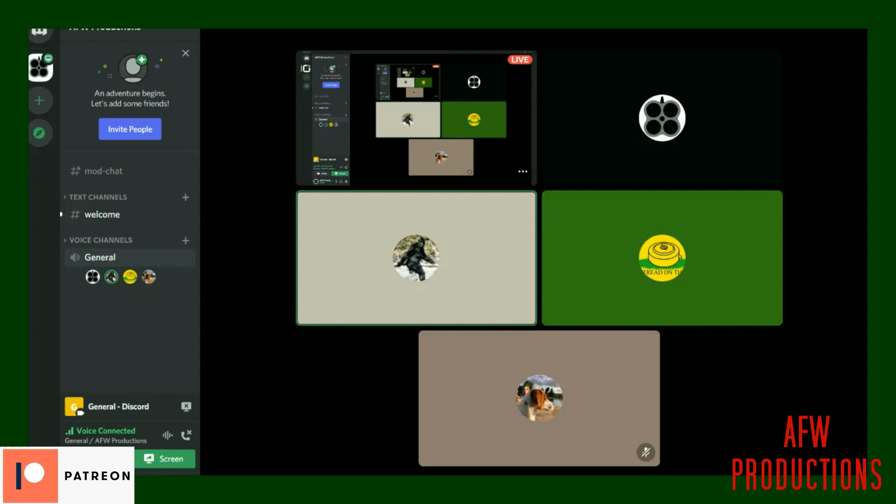All right, thanks. Thanks for doing this, first of all. Small list of questions here. So my first question was, what are all the differences between the Thorncaster and the original Lancaster pistol?

I do want to make one that is actually more of an accurate representation that has the rifling in the barrel machining itself. But for more of a commercial product, something that can be more diverse, I do plan on trying to make one with barrel liners. All you need is essentially one design for the pistol itself, and then I can use different barrel liners that all have the same outside diameter, and then the bore of them is just different calibers.

But other than that, there are a few other features that I do want to change. I want to improve on the sights a little bit too. The sights on the original Lancaster pistol are very open because it's supposed to be something that's used more or less at a closer range. So I want to try to tighten those up a little bit, and part of doing that is I'm actually going to increase the range of this pistol itself.

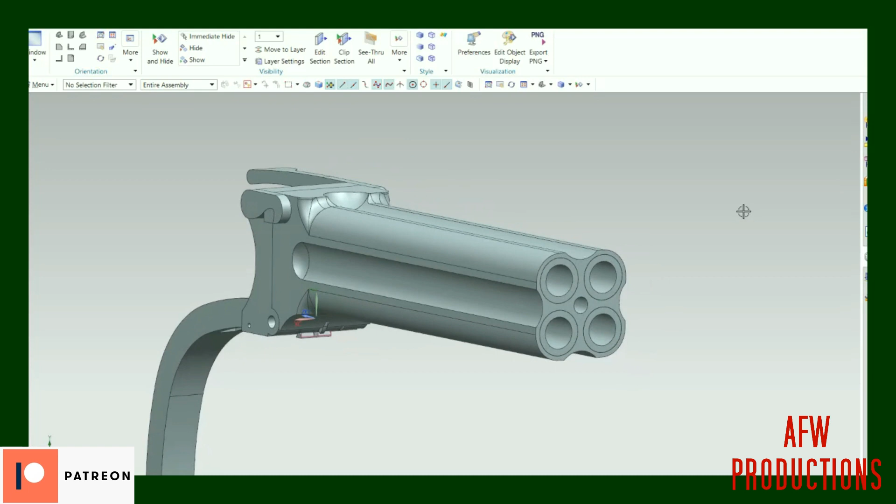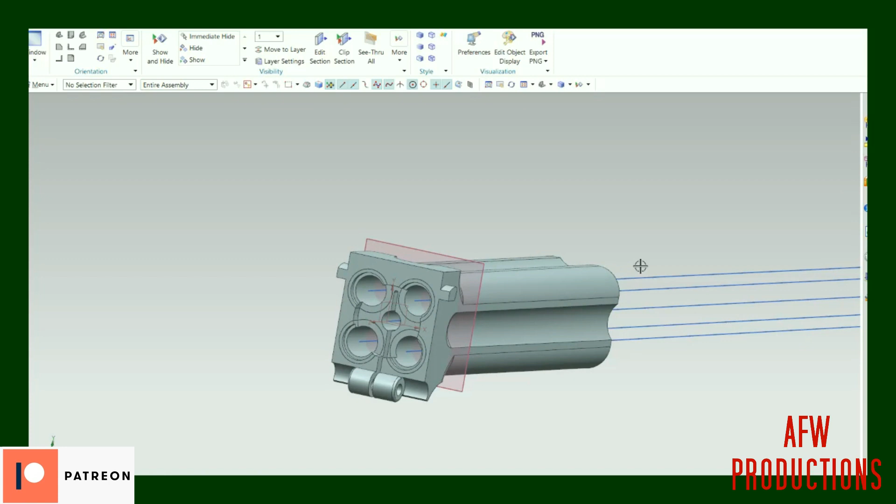So the original barrels are actually slightly angled, right? And there's a point out in space where they'll all converge. And so you see these lines here. Essentially, this was me doing calculations and figuring out what the center line distance between these barrels is going to be, because they are all slightly angled inward. When I took my measurements of the original Lancaster pistol, this only came out to be about 6 feet away from the tip of the barrel, which isn't very far. And so my plan is to increase that to about 25 feet.

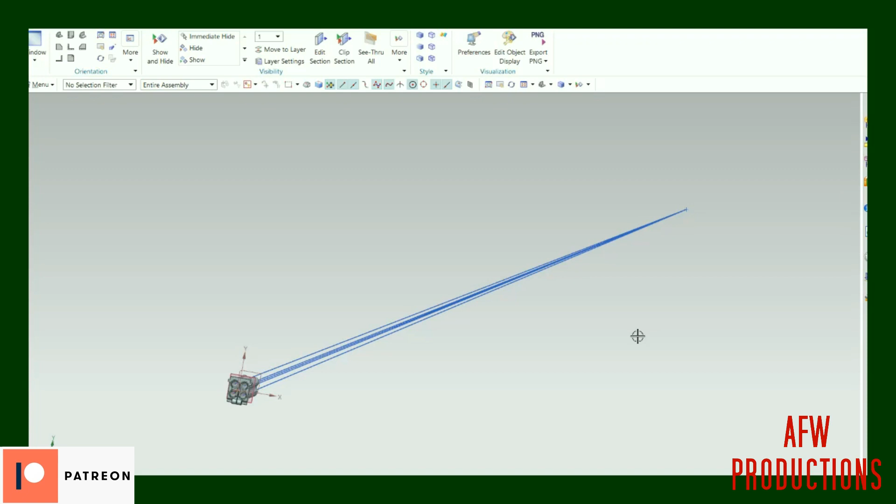Something that's going to give you some more range, is going to increase the accuracy of it, right? Because if it was only set for 6 feet, then after you pull the trigger, the bullet travels 6 feet, and then after that, your spread starts to increase drastically. So, past about 10 feet, your accuracy is going to be not that great. So I definitely do want to make it so this does have more range. It has more versatility with it.

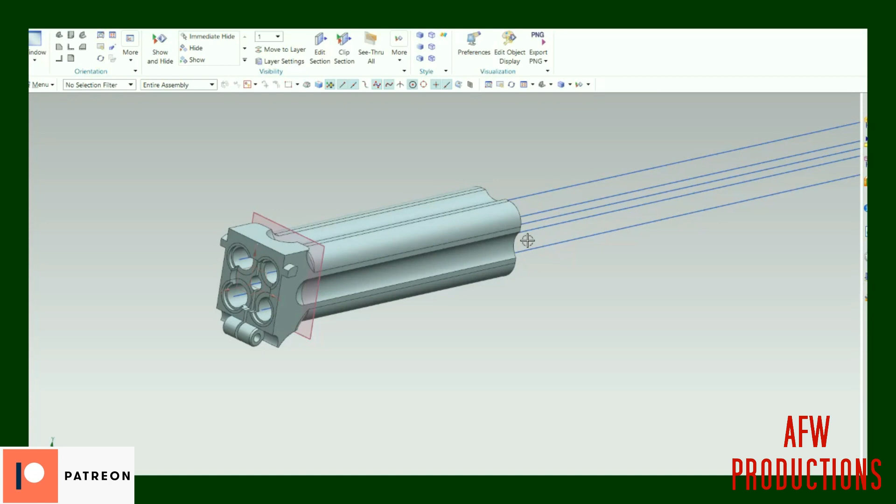So part of that is also for if you're using this, say, for target shooting, or if you want to go use this for hunting or something like that, because these pistols were initially made to hold shot shell. You had asked earlier on the Discord what calibers I want to do this in, like 45 Long Colt, which you can use shot shell in, or even variants of the 410 shotgun shells. And so having more range, so you're able to use it in more of a hunting aspect, say hunting pheasants, opens up that opportunity to use this in more situations than just up close and personal.

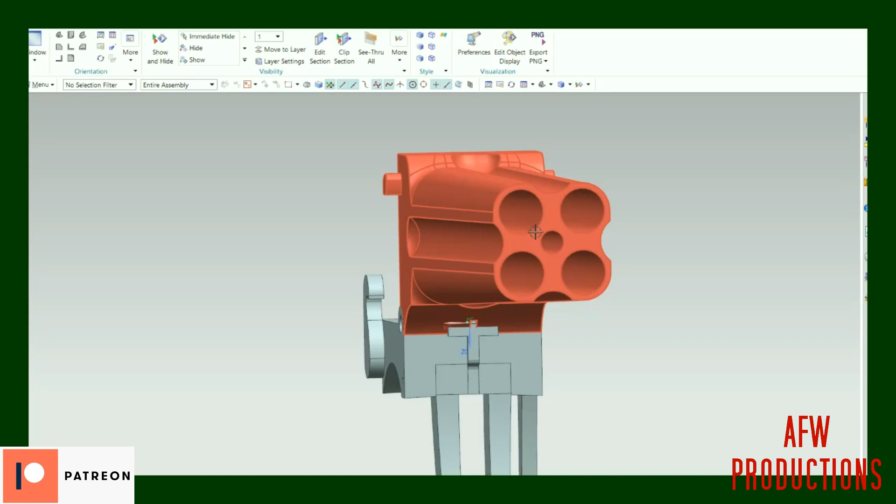Like I said, I do plan on still making more of a true variant that does have the original barrel machining. But there were a few little nuances throughout it. I'm trying to keep it as true as possible, but some of the stuff that I found is a lot of these pistols were kind of custom made, so the parts are not universal parts, right? If you actually look at these hooks here versus these lugs, they're different on each side, and they're actually hand ground or hand sanded and filed down so that they fit perfectly with each other.

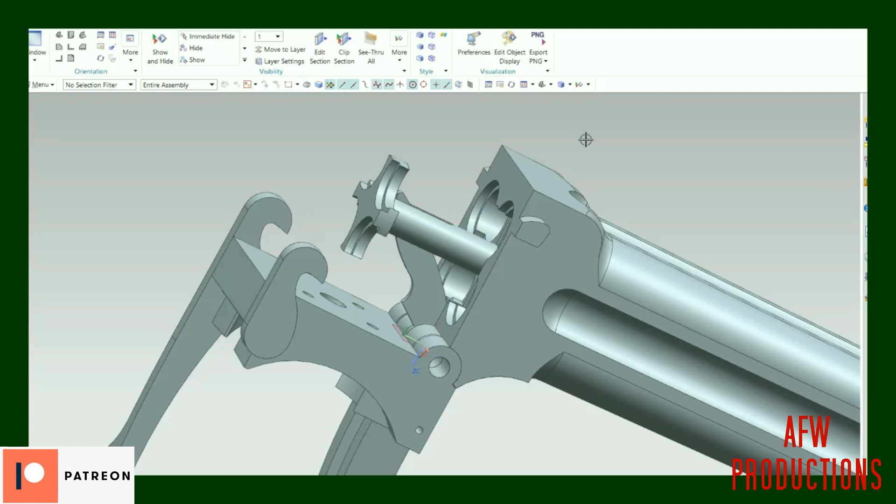So if I go and take one of these barrel machinings and I take the screw out here and I try to put it on a different Lancaster pistol, even one of the same size and caliber, it's not going to fit. So I want to take this away from a more unique individual part-to-part fit and make it something that's a little bit more modular. Even with this extractor lever here and with the extractor itself, kind of some of the same situations with that.

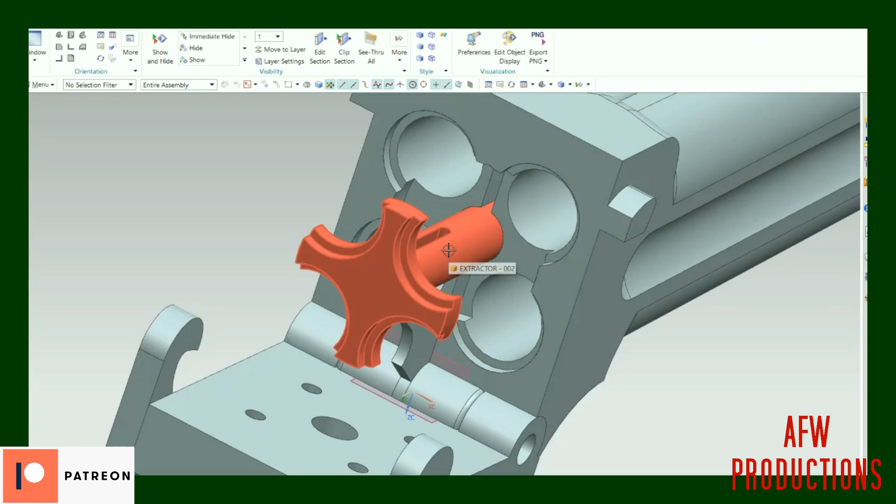One of the things I talked about in my video, getting back to it here, but this feature right here, the original extractor actually has a piece here. And what this does is this fits into a groove inside the barrel machining.

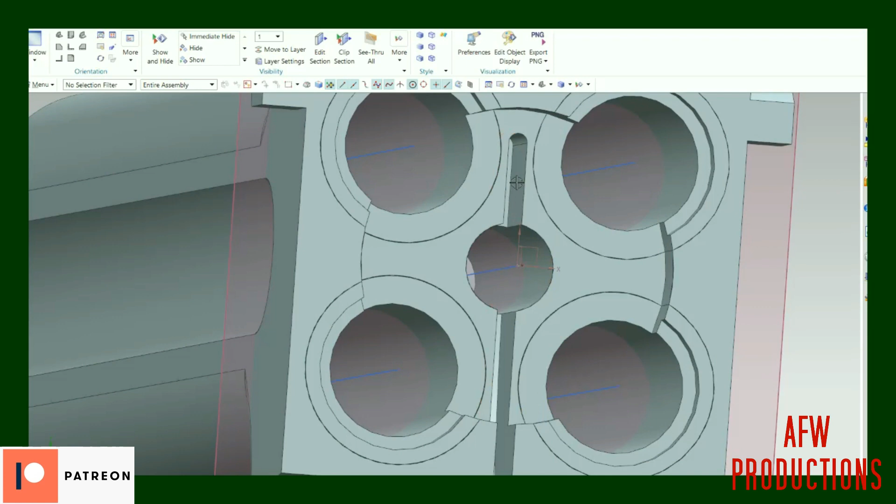And so in here, this notch that I have taken out is actually for that little lever that you see here, right? This is for this to sit inside of there. And I know I'm bouncing around a lot, but I'm trying to give you a little bit of an idea of how this looks and what you're actually seeing.

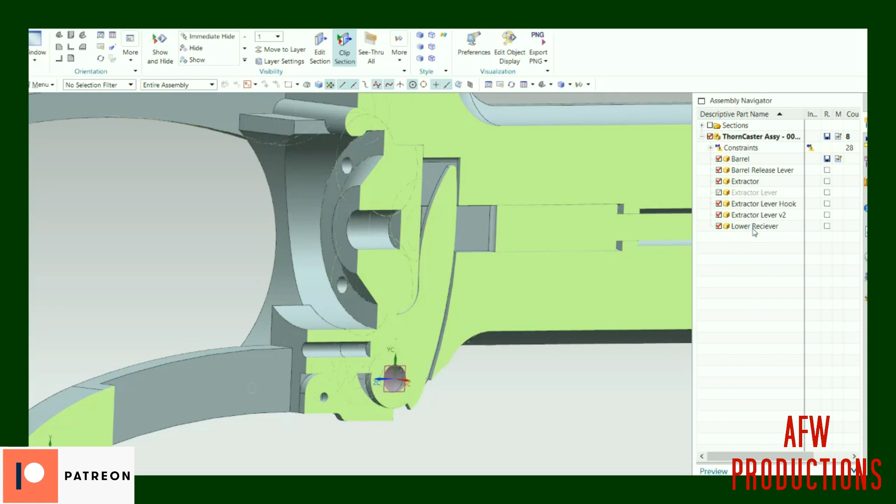So this is a cross-section view here, where this piece here is actually your extractor lever. You've got your extractor here, and let me hide the receiver. Let's turn it off so you can get a better visual. But essentially, there used to be another notch here in the barrels for this extractor to actually sit in there. And what it did is it helped the clocking of the extractor itself.

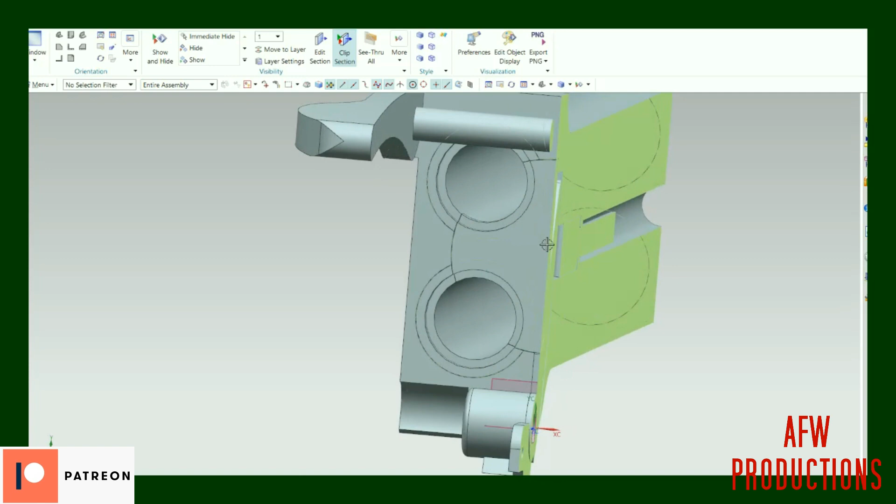So this wouldn't rotate as it's being pulled out of the barrels, right? And there's only one way that an extractor could actually fit in there. And the issue with that is you have this very long, very narrow channel that's just difficult to machine. They don't really make end mills that are that long and that tiny. You'd essentially have to go to a more complicated form of machining, something that would drastically increase the price of machining these barrels.

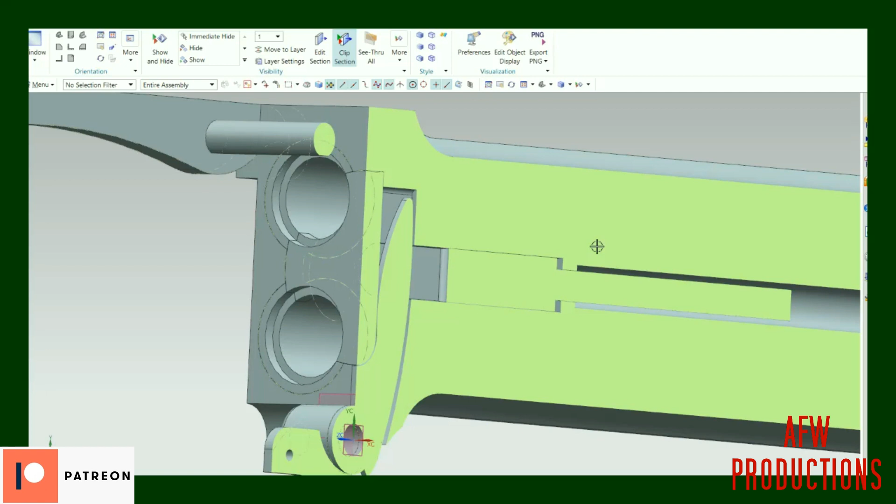And so I'm trying to take into consideration manufacturability in the design. So when I make a change, it's something for producibility or manufacturability, or something to help drive costs down rather than keeping it one-to-one exactly true to the original pistols. But other than that, I did come to a stopping point with the original design and using the barrel liners, and so I've actually been transitioning the models that I had for the Thorncaster with the barrel liners to more of a final model Lancaster, almost a one-to-one reproduction.

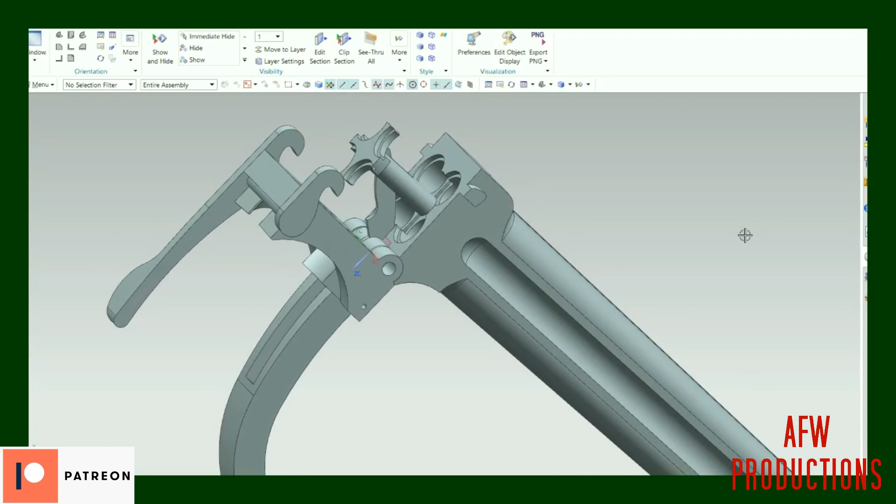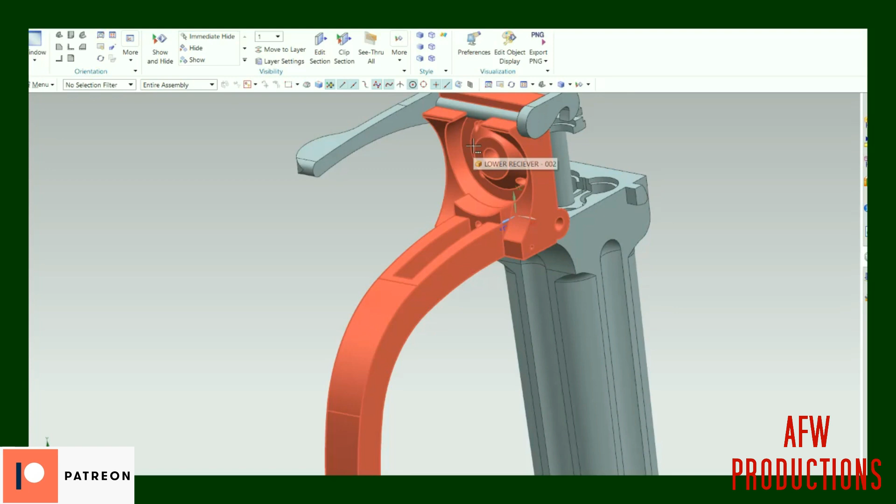The reason why I made that switch was because the design of the pistol was getting almost too large for you to hold in your hand. And with that, a lot of the mechanism in the back was changing quite a bit. So to get away from having to completely redesign everything, I've switched to doing more or less the Lancaster pistol itself, closer to a one-to-one replica. That way I can understand how that's going to translate into doing the Thorncaster itself, which is going to have a much larger frame.

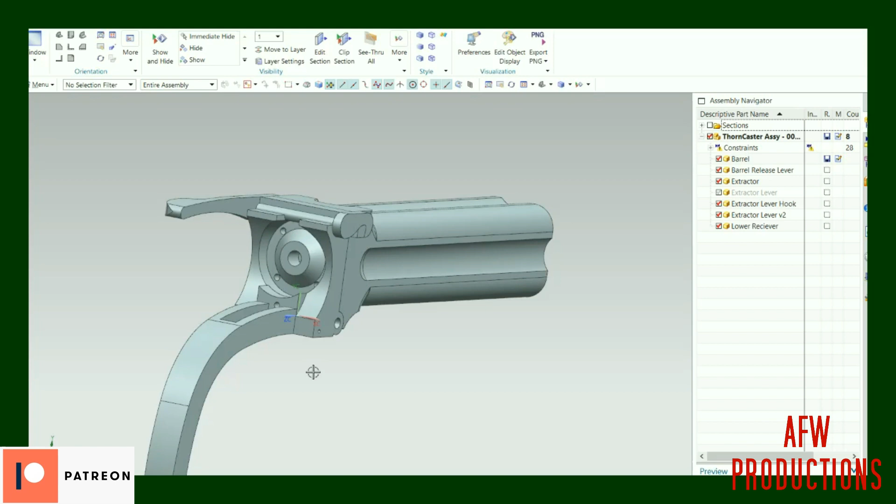But the clockwork mechanism back here is still something that I'm working on. It's still something I haven't fully defined. It does use a lot of spring clips. It does use a lot of older methods that could be done a little better. So that mechanism in the back is probably going to be improved upon, but I can't really say this is what the final product's going to be and how it's going to differ back here. Does that answer your question?

Yeah, that kind of helps, thank you.

I have a couple of questions actually. Sure. So the replica is going to be made for smokeless powder, correct? Yes. So it's going to be made for more current cartridges. It's not going to be made to use black powder or some of these older cartridges from around the turn of the century when this pistol was made back in the 1800s.

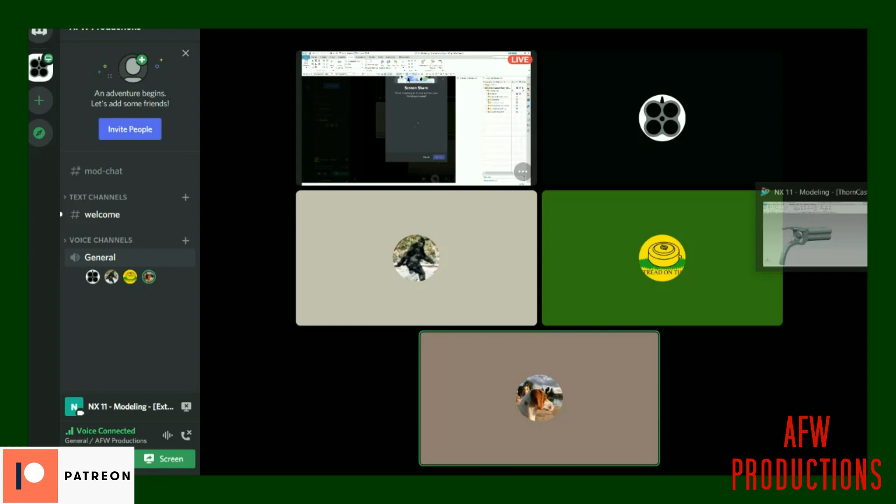Sure. So the question is, from a material science or design standpoint, what changes did you make to accommodate the change from black powder to smokeless powder? Or what's planned to be changed at least? What you're getting at is what changes am I making so that the barrel doesn't explode, right? Essentially, yeah, for the higher pressures, how are you compensating for that? Is it a change in material, change in barrel thickness, etc.? And so it's more or less a little bit of both.

So like with the barrel liners, you can actually see this is currently set for 45 Long Colt, right? And so with this, you've got the barrel liners and you've also got a lot of material around the barrel liners, because those liners are pressed into the barrel machining itself. And the wall thicknesses are getting quite large.

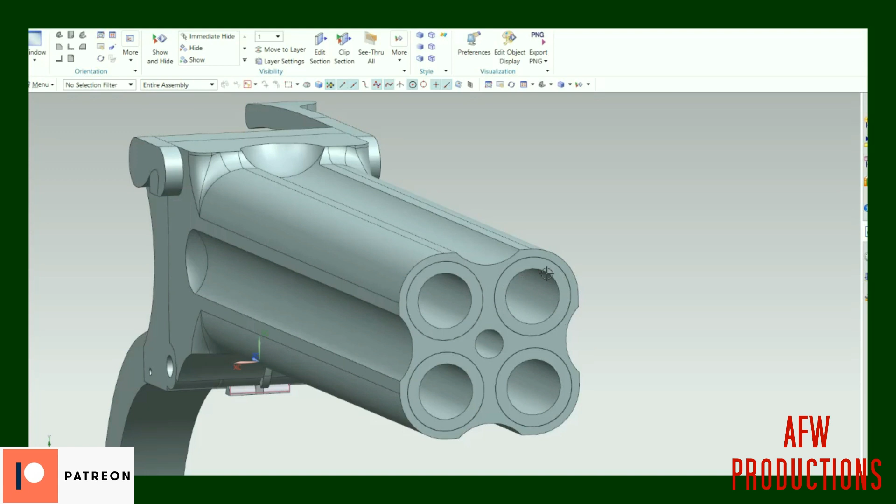Now, granted, this is just an off-the-shelf barrel liner, which is supposed to be able to handle those pressures for a modern 45 Long Colt. But then also, yes, adding more material around there too. But a lot of it's going to be once I get a design more fleshed out, and the materials I'm going to use, maybe what the material of the barrel liners is going to be, or even on the more true replica, what the material is going to be, I can do stress analysis in NX to find out what that's going to come out to be.

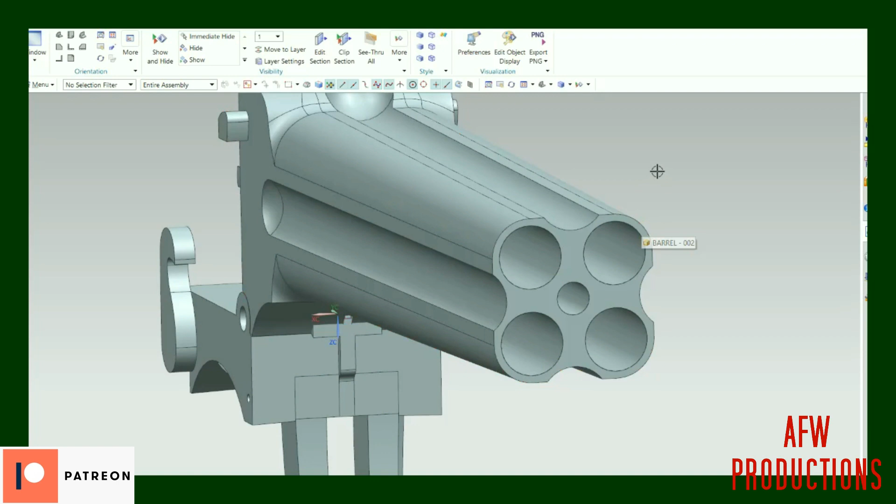It is almost a little bit of trial and error at this point. I do plan on proofing these regardless of whatever calculations I do to compensate for using a more modern cartridge. I do plan on testing these and making sure that they're not going to fail.

But as you can see here, to your question, you can see how thick the material is back here by the breech. And even when it starts to get away from the breech and the boxiness of it and you get more into the curved barrels, if you look at the thickness here from the bore to the outside, it gets a lot thinner as you go down, which is also kind of what the original Lancaster pistol does to a certain degree.

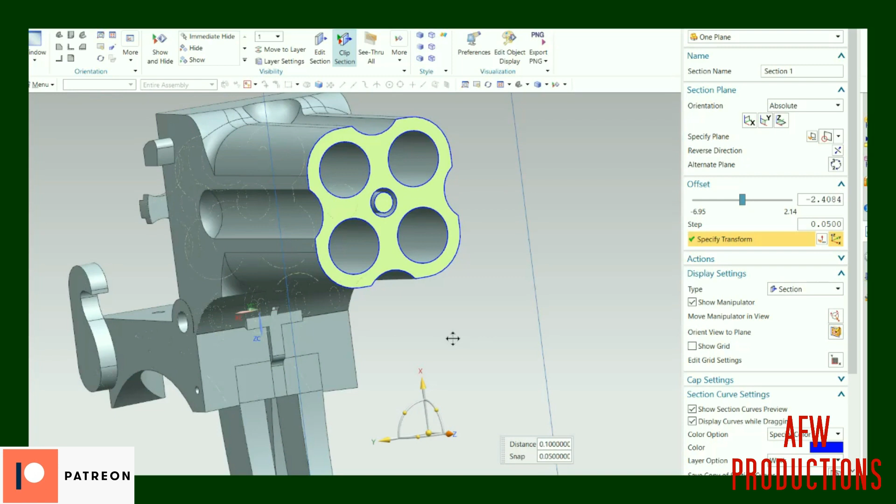But I'm trying to make it so that the thickness of this is actually extended further down for the longer cartridges. The current one that I've got is chambered in 476, which is very similar to 455, just a little bit longer. But if I'm going to be using 45 Long Colt and somebody wants to maybe try to put 410 shot shell in here, this is going to have to be able to hold those pressures further down in the barrel. So yes, thickness increases, and material properties are going to have to be looked at and analyzed.

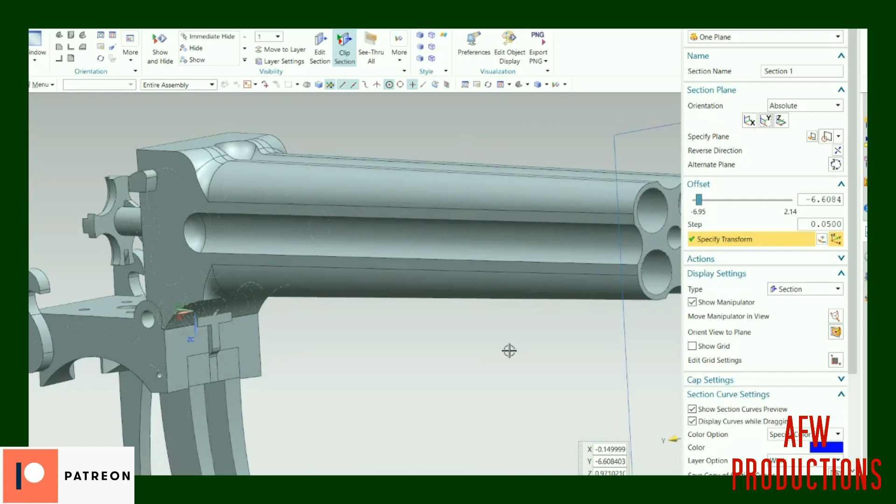And then ultimately, regardless of all that, we're going to go ahead and proof this. We're going to make a barrel, create a jig, slap some shells in there, and do like a 25, 30% overload of the charges, put it through there and see if it handles it. We could see the barrels failing on us, or they could handle it just fine. But either way, we want to make sure we're testing that to the fullest and not just releasing a product that's going to blow up the first couple times you shoot it. Does that answer your question?

I have another question that's more or less unrelated to that. So we talked a little bit about the planned differences between the original and the reproduction. Do you have any plans for a phase 2 or phase 3 where you release more modernized versions? I mean, the design can always be improved upon, right? But what I'm trying to do is more or less a more modernized version, trying to stay a little true to it, but also changing the designs in terms of ease of manufacturability.

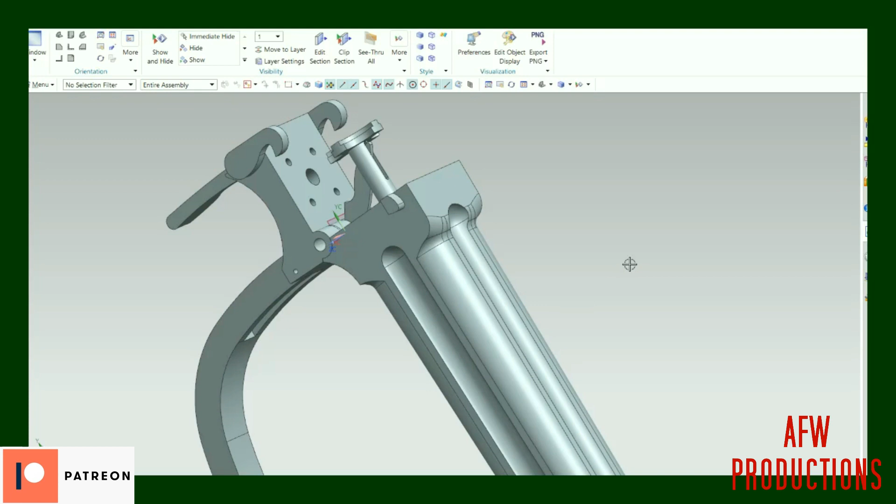But I do think later on down the road, after, say, I do one that has the barrel liners, maybe one that's a little bit more true, I can definitely come back and look at this, like a phase 2, phase 3 kind of aspect: what can we do to make this the most modern, most efficient, make it modular and easy to work on, compared to taking something that's already existing. So it's kind of on the back burner, because it's going to really depend on how successful these turn out to be.

So a Picatinny rail with a low power variable optic is off the table then?

I can... you know what, I'll tell you what, because I'm changing up the sights on this and I want to make it so that you can actually do changes in the sights. I'll work with you to create a certain type of mount where you can actually put a little rail mount on here and you can put a scope on there, and I'll work with you on that, Scott, all right? I think an ACOG would be beautiful on one of these suckers.

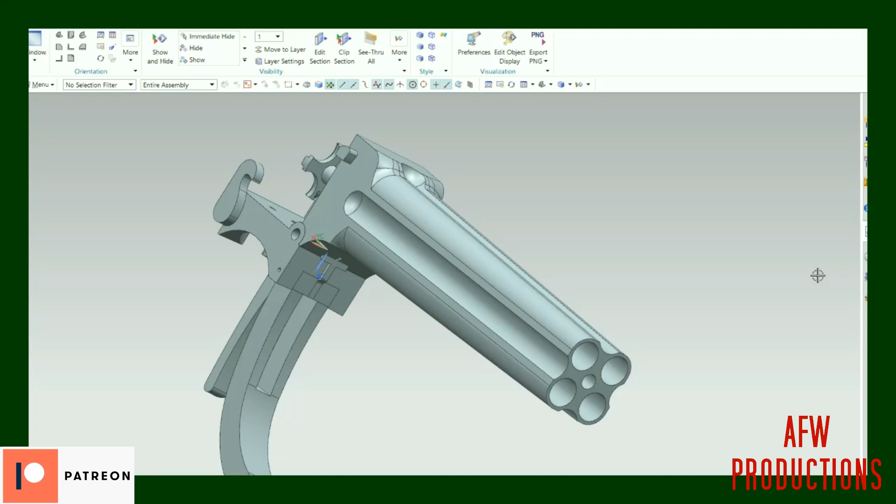Okay. We'll just go hunting with the hand cannon. We can hop back to Garrett. I know you still got some other questions.

Yeah. Are you still using the rotating firing pin mechanism? So yes. What's actually really interesting is in the video where I talked about the history of the company, the pistol, the previous owner, I even talked about some essentially imitation knockoffs that people were making around the time. And one of them was a pistol that instead of using the rotating firing pin that actually moved around, it had like 4 separate firing pins. And one of the issues they were running into with stuff like that is the multiple barrels would fire at the same time, or the gun would discharge when it wasn't supposed to.

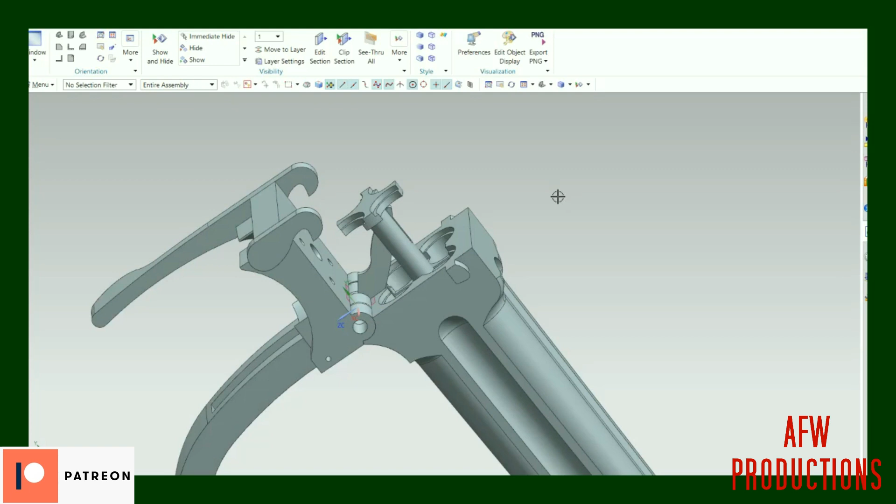So one of the things about the rotating firing pin is, like 150 years later, this thing is still a very reliable mechanism. Back in the late 1800s, this pistol was known for its reliability, for not having to clean it, not having to service it. And so keeping that mechanism while making a few tweaks to it is the direction that I do want to go. So yes, I do plan on keeping the rotating firing pin, but the mechanism itself may slightly change to be a little bit more modern or easier to manufacture or a little bit easier to use. Cool. Yeah, I like the rotating firing pin myself.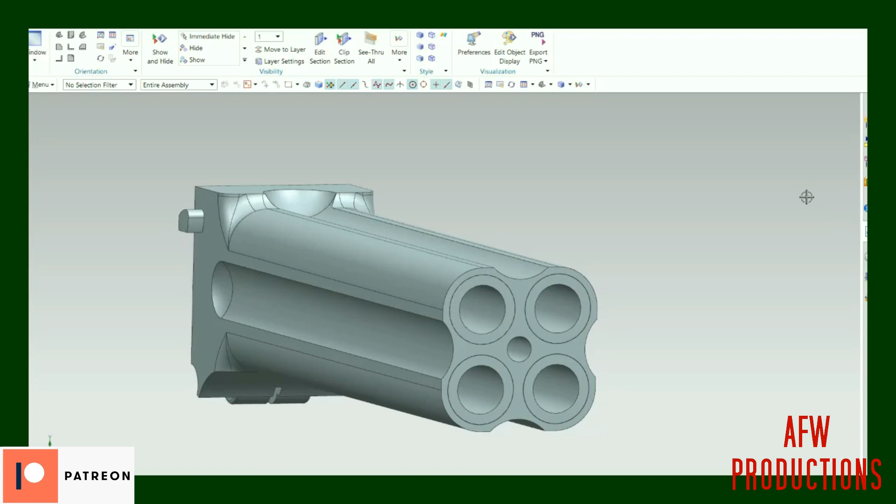Oh yeah, so you've been doing a lot of talking about barrel liners. Not too familiar with them. I think I understand. So this is the model with the barrel liners. Let me get rid of a bunch of these datums and curves so it's a little bit easier to just see the raw model here. So essentially, a barrel liner is something that you would slap down the barrel, and it's essentially to rebore it. In certain situations, they'll have an old gun where the barrel has been worn out because it's been shot so much that the barrel's degraded, it's been oversized, maybe it's pitted from corrosive ammo or something of the sort. And so they'll bore out the barrel itself, and then slide a barrel liner in there, and that allows them to get a crisp, clean bore in a damaged barrel.

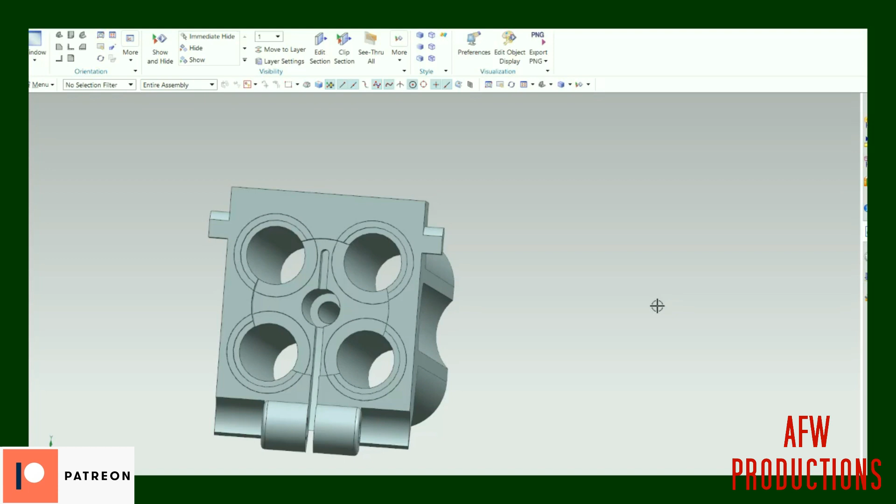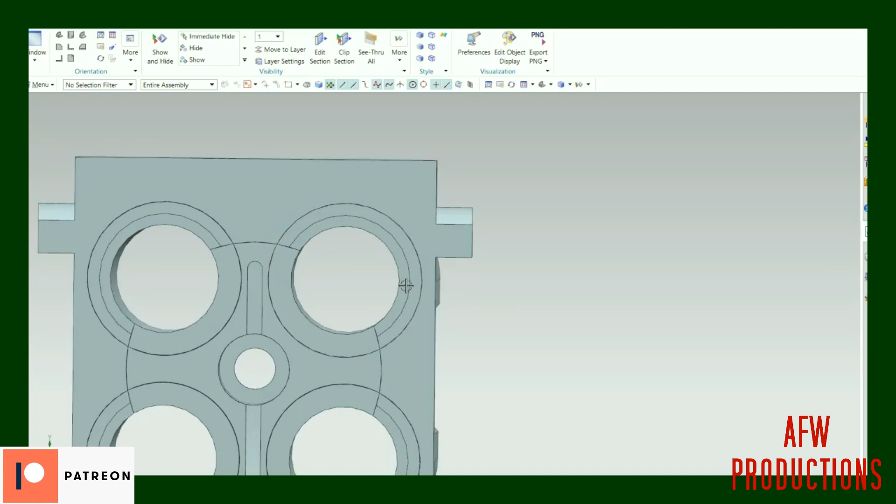I looked online, and what I'm basing this model off of is something that's just off the shelf. Because usually, say this bore got damaged, they would oversize it, and then they'd put the barrel liner in there that has the correct bore, and it's able to be press fit in there, and they sometimes use different types of epoxies and stuff of the sort. But my idea is to use that out of the gate, so that with the machining I start off with, I can use any kind of different barrel liner. So this is essentially what I would start off with, right?

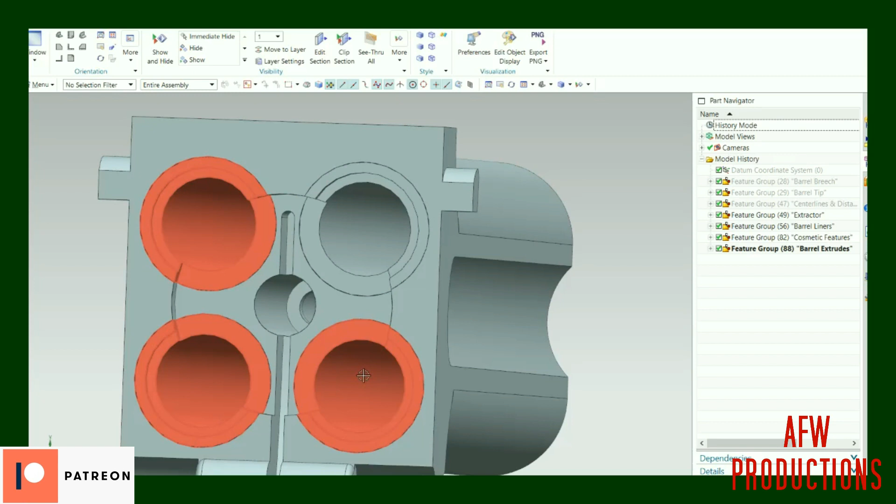Then depending on whatever caliber somebody wants the pistol chambered in, I can press fit a 45 Long Colt barrel liner in here, a 357, a 44 Special, whatever they would want. And the original design with the different barrel liners can be chambered in any caliber somebody would want without a complete redesign of the pistol. So that's a bit of how they're used, what they're used for, and how I'm integrating that into my design. Okay, cool.

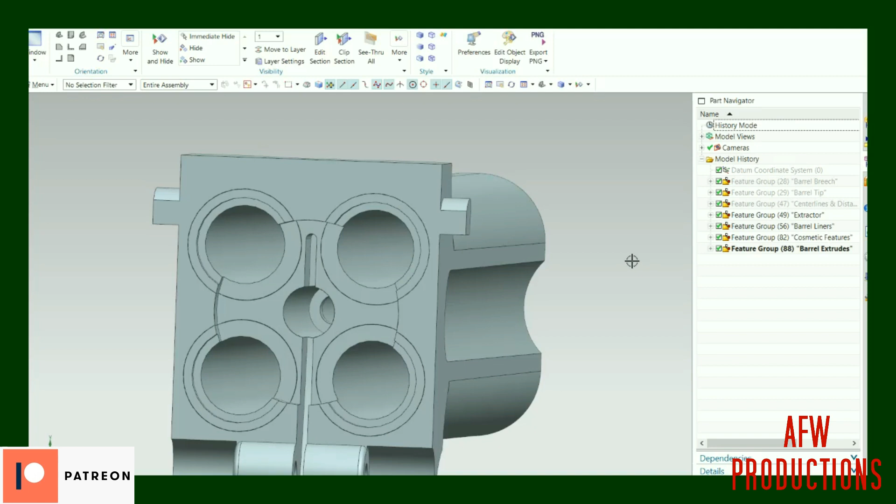So it's a permanent attachment, not something that the buyer could remove? I have been trying to think of how I want this design to be so that these barrel liners could be interchangeable. To start off with, I would like to have something that makes these barrel liners a bit more modular, so that you can actually slide in whatever kind of barrel liner you want to use.

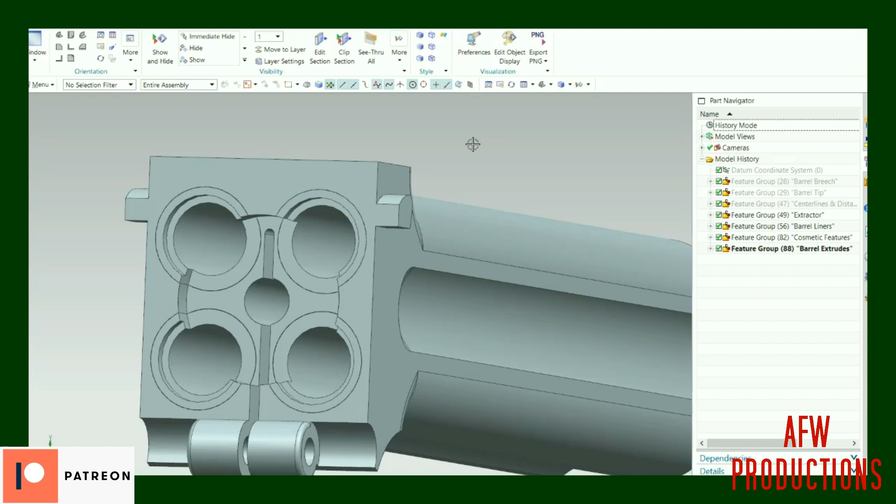You have your base frame without any liners in it. There's some sort of a mechanism that, when you slide the liners in there, it'll hold them in place in the correct orientation, and it's very easy to then change whatever caliber you want to be shooting.

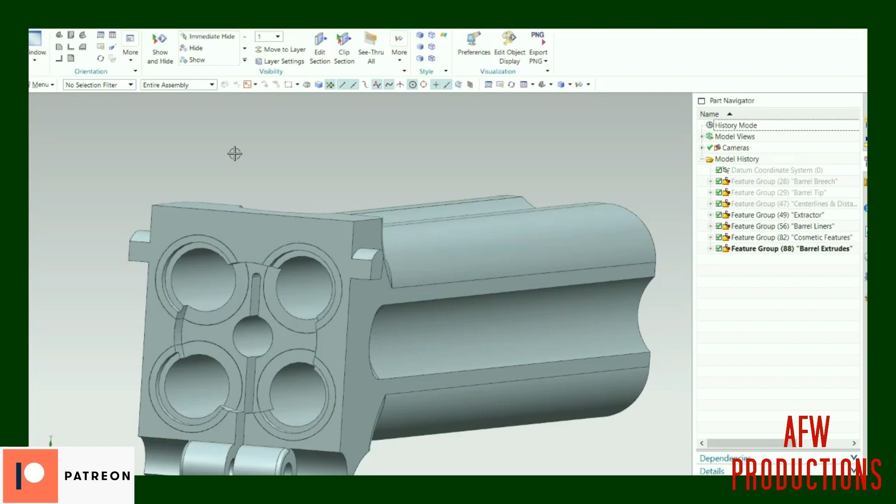Thank you. What about something like a shotgun barrel liner, so you can shoot different calibers out of your shotguns? Have you thought about that route, that you just slide it in that way? That would be an option. So I've got my counter bore for where my flanged casing will sit, right? So you're saying if I had a different barrel liner that I slid in there, that could be for, say, 357 or 38 Special or something like that. That would actually be an option.

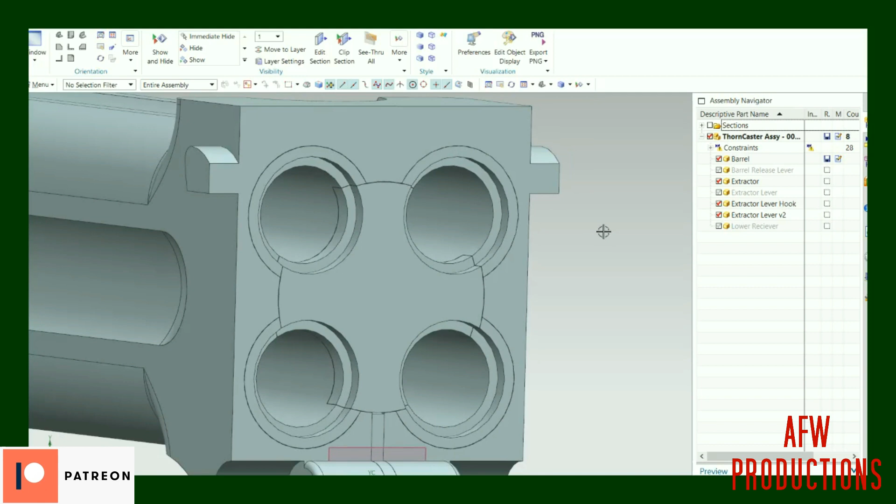So then I start off with, say, hey, I have this design. It starts off with 45 Long Colt, and then you put the different liners in there, kind of like you were saying with a shotgun, and you can actually change the caliber. And that's what you're getting at, correct, Mike? Yeah, that's what I'm getting at. I guess Garrett, back to you.

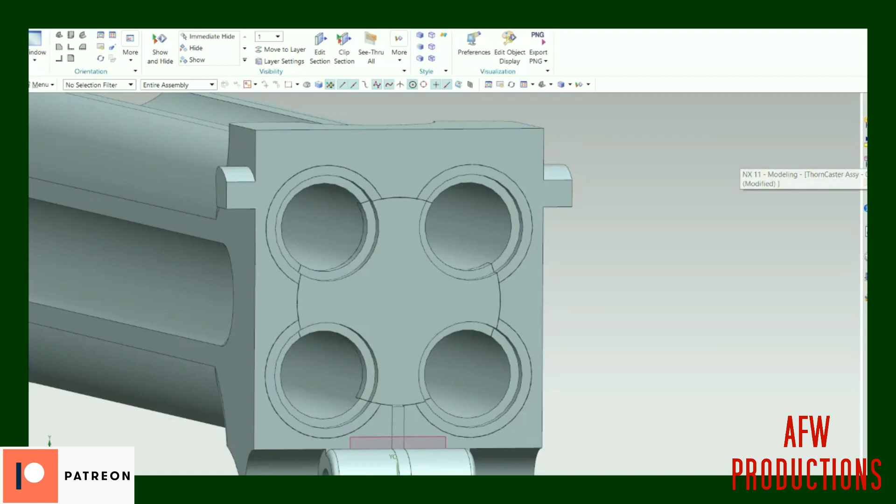All right. The original ThornCaster with no barrel liner would be in 45 Colt then? Is that what you're thinking? Yeah, both of them are going to be set to be 45. That's going to be the largest caliber that I'm going to do, and the baseline model is 45 Long Colt. Thanks. Personally, the reason I was asking about barrel liners is because I wasn't familiar with them, and I'd be most interested in one without the liners in 45 Colt. The interchangeability really doesn't matter to me.

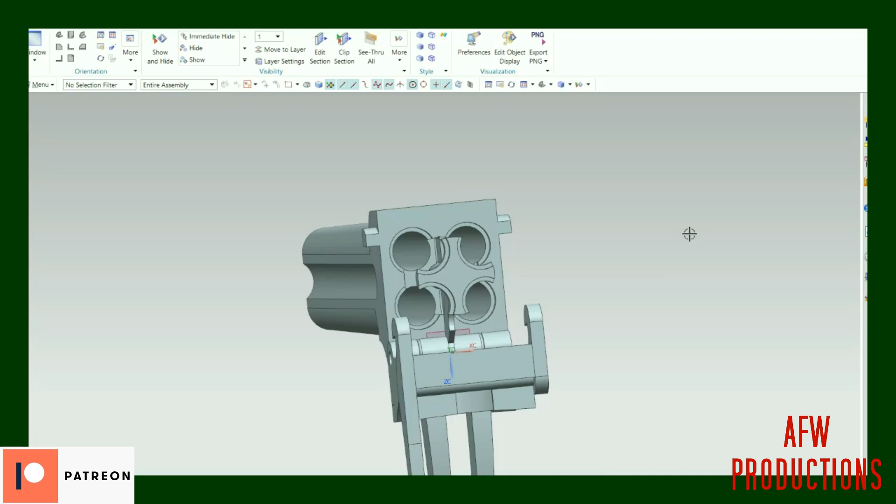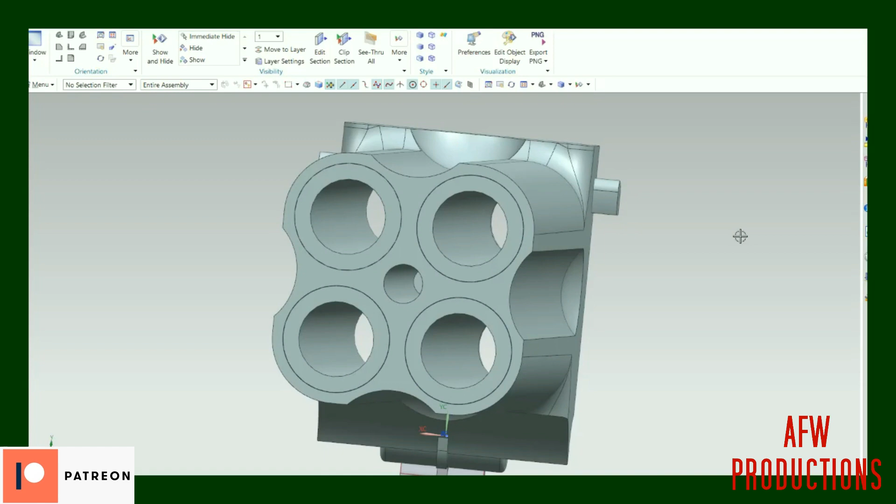I was just curious. Right, and so, I don't want to say I've been dragging my feet, but why it's been taking me a little longer to progress with the design is because using the barrel liners initially was an interesting idea, but I'm almost to the point where I'm thinking I might go away from that. To Mike's point, if I can have an original one that doesn't have any barrel liners, it's more or less a truer replica, and that seems to be a more desirable path, especially from a customer standpoint.

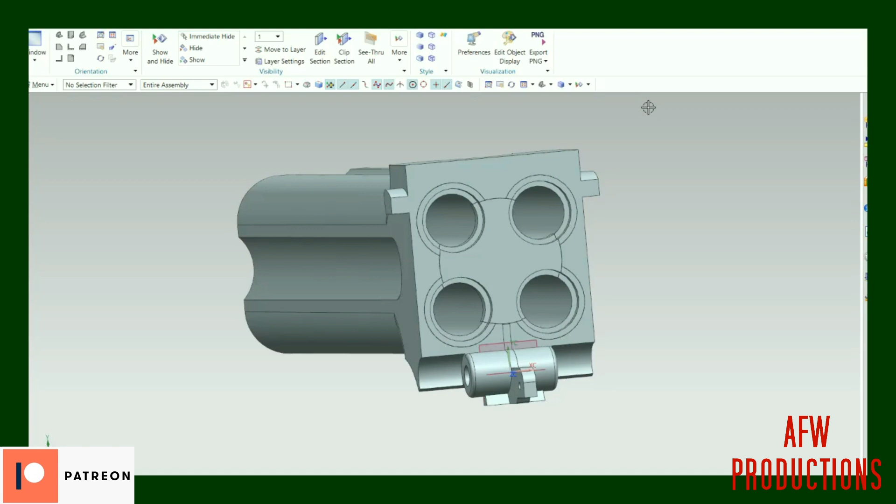But the other aspect too is, as I use the barrel liners, this is causing the pistol to become much wider in your hand. With that, the issue is how are you going to be able to hold that and grip that, and how's that going to work for you? The upscaling of everything, besides causing a lot more time and effort put into the redesign, is causing a lot of issues with just how you're going to be able to use the thing.

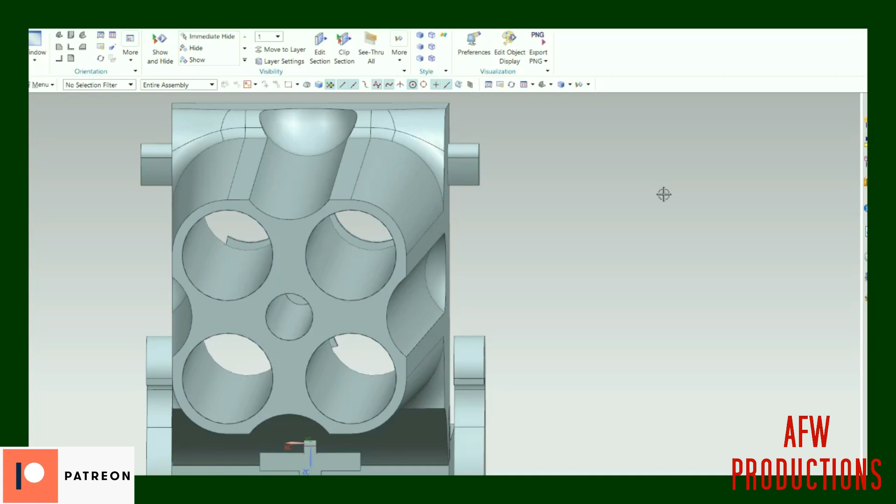Having something like this would be more ideal, but there is a caveat, which is a little bit more in favor of the liners, because when it comes to rifling these, we would have to make sure that we're rifling to center of each of the barrels, because like I stated earlier, each of these barrels are off at a slight angle. So whenever you do your rifling, you've got to make sure that you're pulling your button, or whatever you use to rifle this, straight in line with that barrel.

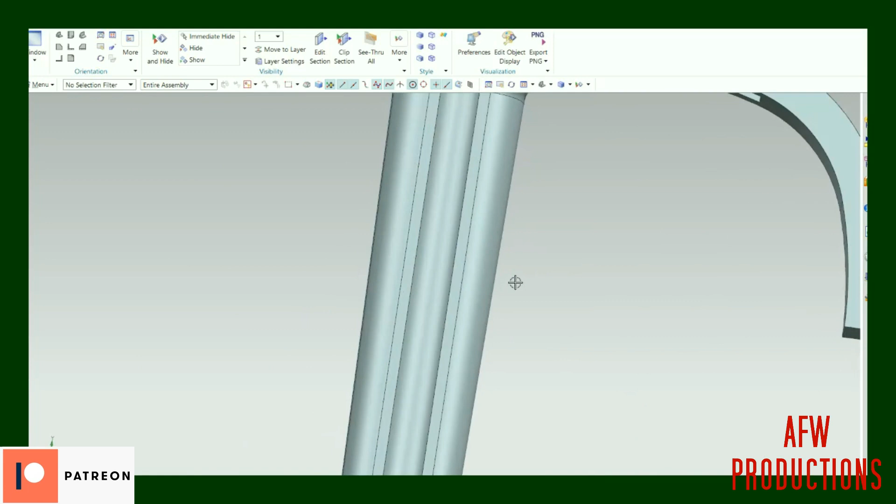If I take this barrel and just set it on a desk and try to push a button straight down through there, well, this barrel's at a slight angle, so I'm going to be creating non-concentric rifling with that barrel. It creates a little more complication with making sure that I get the correct rifling in there, and that the rifling comes out perfectly in line with the barrel and it's not off because the barrel is slightly angled.

And the barrels, they're angled to the point that they're not perpendicular to, say, either the breech or the tip of the barrel. And so the idea with the barrel liners was that took away the whole need of having to bore the barrels themselves and create any rifling in there, because once I create the bores for the liners, all I do is press the liners in there, they've already got the rifling in them, and I'm good to move forward.

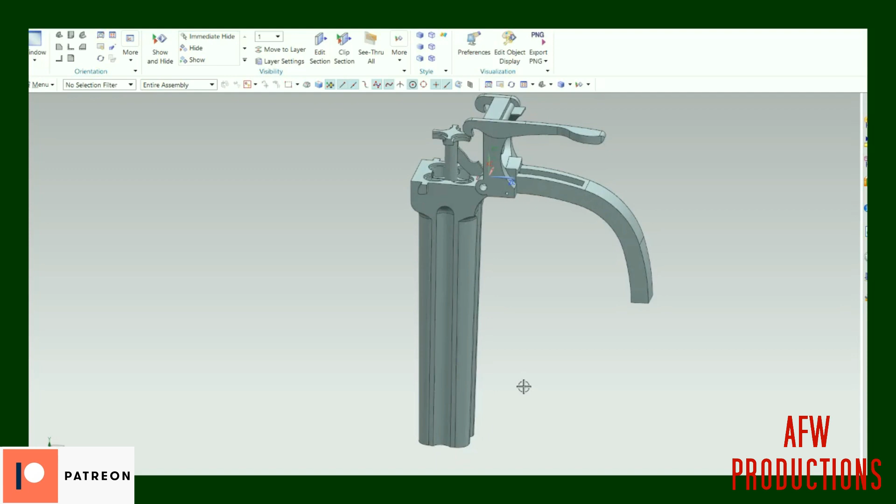So I'm trying to answer your question, but I'm also trying to help you understand where I'm coming from with why I'm going this other direction and what my reasoning for going this other direction was. Yeah, that makes sense. Okay.

Like I said, there's kind of a pro and con aspect to it. The barrel liner side of things makes it a very easy to manufacture, more commercially available kind of product. This would be a little bit more involved, right? Because now you're having to do so much more to this barrel itself and put everything into the barrel rather than having a sleeve that's pushed in there.

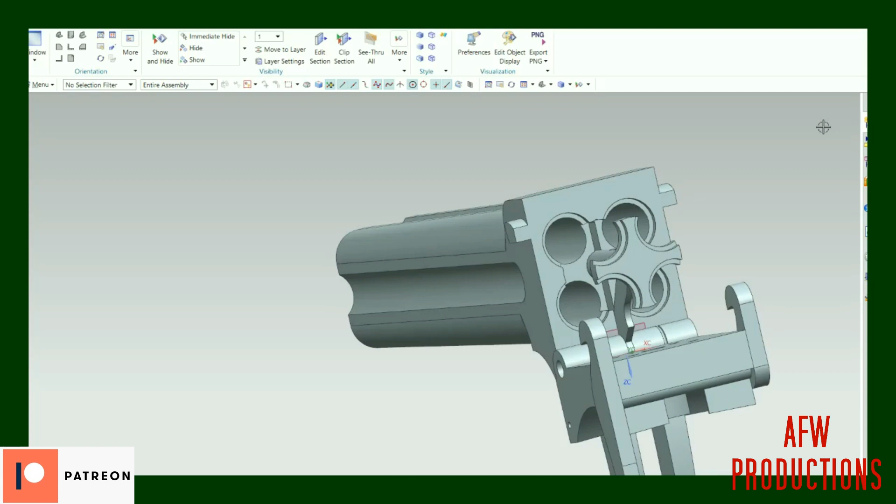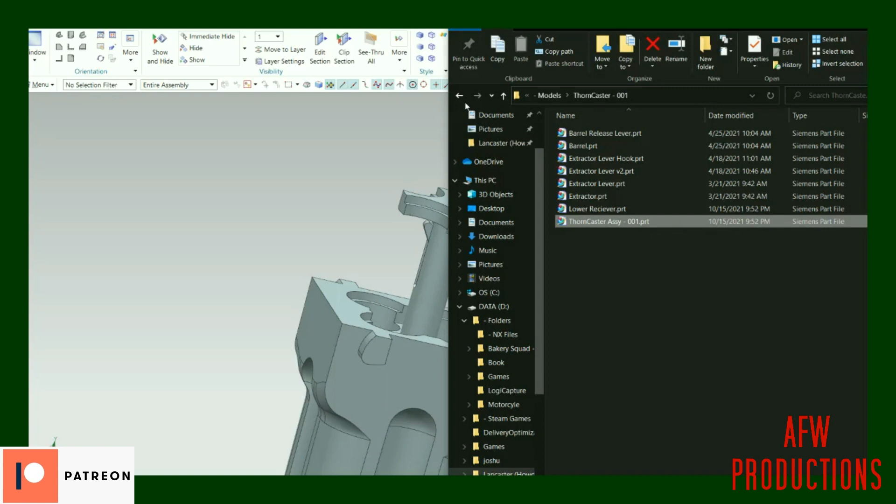I want to talk about the extractor. When you break it down, it lifts the four casings up, right? But it doesn't eject them. Is there an ejector rod, or at that point you just pull them out and put new ones in? So essentially you just pull them out or you dump them out, actually. And I can actually show you a little bit about this too here.

So let me dig through some of my files really quickly. I want to open this up and I feel like it's going to start off being loud. Looks like it's going to start playing music. So give me a second. Let me open this up, pause it, mute the music on it.

So this is the montage that I threw up on YouTube, right? You've got me, my gunsmith, my girlfriend shooting the pistol. So here we can actually see it operating. It goes up, and then after it gets to a certain point, the extractor will snap back down. So all it does is lift them out, and then the extractor snaps back down into the barrel once you reach the full 90-degree bend from the receiver. So there's only just the extractor, and you just dump them out.

And what you can see here is, because this is chambered in 476, which also takes the 455, the 455 is a shorter casing, right? So as we let it snap back down, sometimes these casings wouldn't completely fall out and they'd go underneath the extractor, which is what you're seeing here. But no, there is no ejector mechanism in it. It's just an extractor, and you flip the gun upside down and dump the shells that way. You can see here as I open the barrel they fall right out.

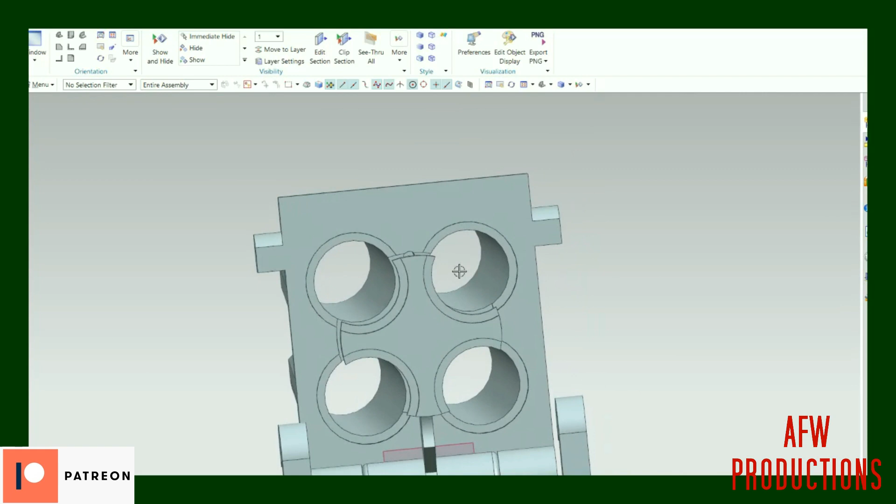In order to make an ejector mechanism that actually shoots them out, there's going to have to be a lot more that goes into this barrel. The barrel's already very complex as it is. I'm also very strapped for space inside of here, between the barrels having to have room for the little lever here and the extractor itself. Having more stuff cut away and more springs put in there, I just don't have the space for that in my current configuration. It'd be more one where you can just dump it over and the casings fall out, as you can see here.

Yeah, I still like that, and it's more original too. Mm-hmm.

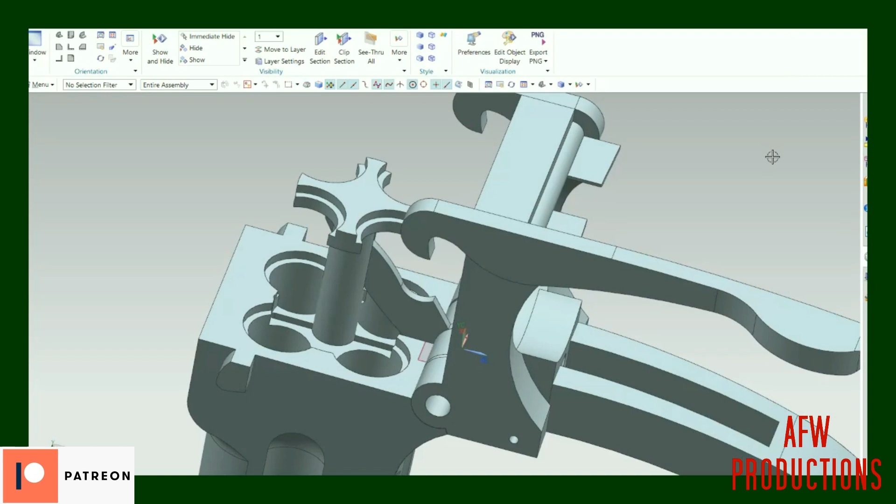So here's a crazy idea. Go for it, I'm open to ideas. You familiar with speed loaders, but what if you could have like a 4-round square speed loader? So that was also something that I was considering too. So have like a speed loader, or do you know what a moon clip is? Yeah, like the crescent shape?

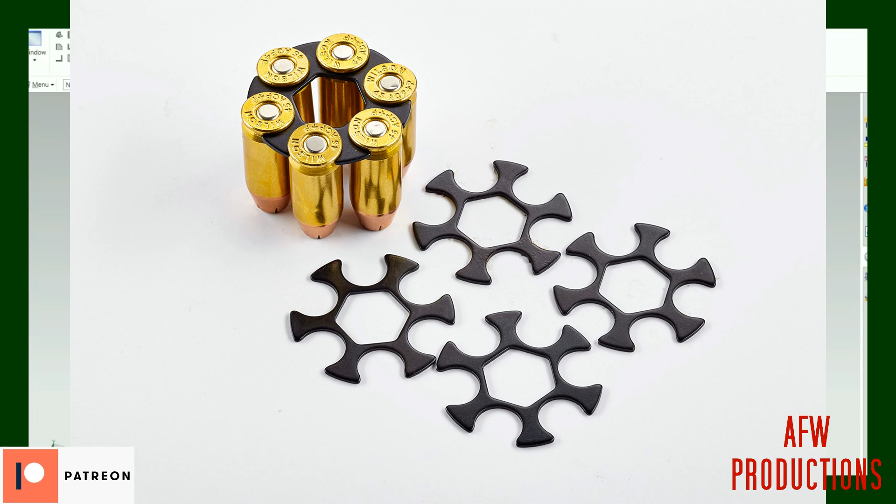Yeah, and so essentially for revolvers, you'd have your speed loader, but what they would actually do is they'd have this little plate that holds the back of all the bullets. You put it in the back of the cylinder of the revolver and you slide the cylinder over and it sits in there just kind of holding the back of the bullets, right? So we could probably make a speed loader kind of a deal for that.

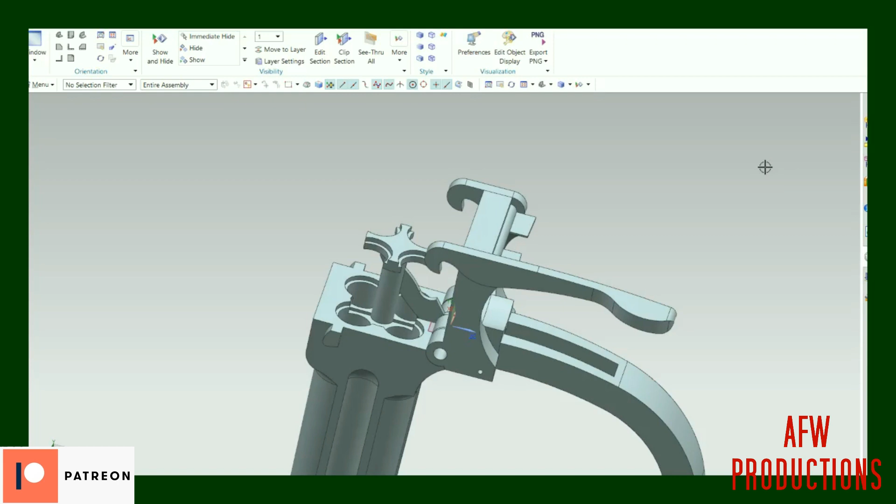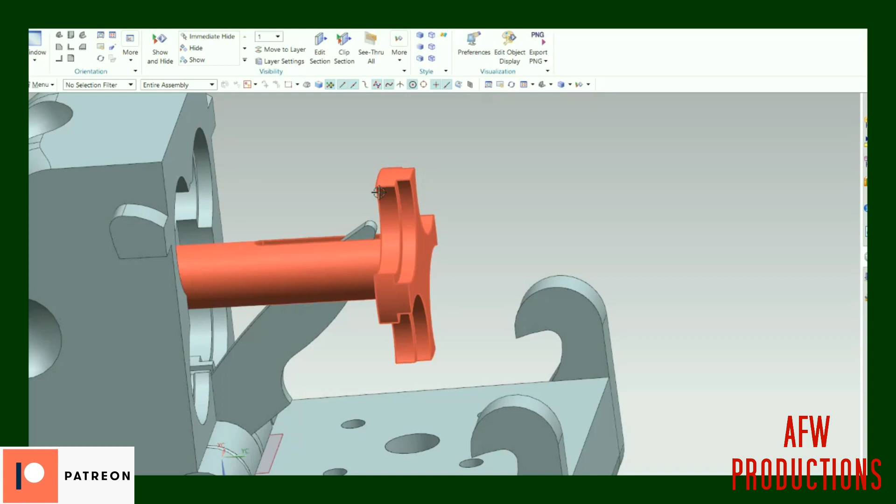But what I'm getting at with the moon clips is having it where you could swap out this extractor and it would be recessed even further to the point that it's actually holding on to the casings themselves. And then you set it in there with all the 4 bullets attached to it, and then you're able to close it because there's enough space for that clip, because this extractor would be thinner. And you'd have a little recess for a moon clip.

Initially, my buddies and I sat down and said, hey, what would be a good idea? What could we do to make this more commercially available, more marketable, more ideal, right? Because there's going to be the people that want the more original version and people who want something that's a little bit more diverse.

And part of that was, if we make it where the pistol could use moon clips, then you could have 45 ACP, because they snap around the groove in the 45 ACP rounds and hold them on that clip, and that acts as the flange that holds them in place. Like with your 45 Long Colt where they sit on this counterbore, that moon clip acts as that flange holding those casings there, and you can open up a whole other type of ammo that you can put through these.

So it is something that we're looking into and something we've considered. Probably a speed loader type of thing could be more available for the first generations that come off the line, and then moon clips and opening up diversity in the ammo would probably be like Gen 2, Gen 3 kind of a deal.

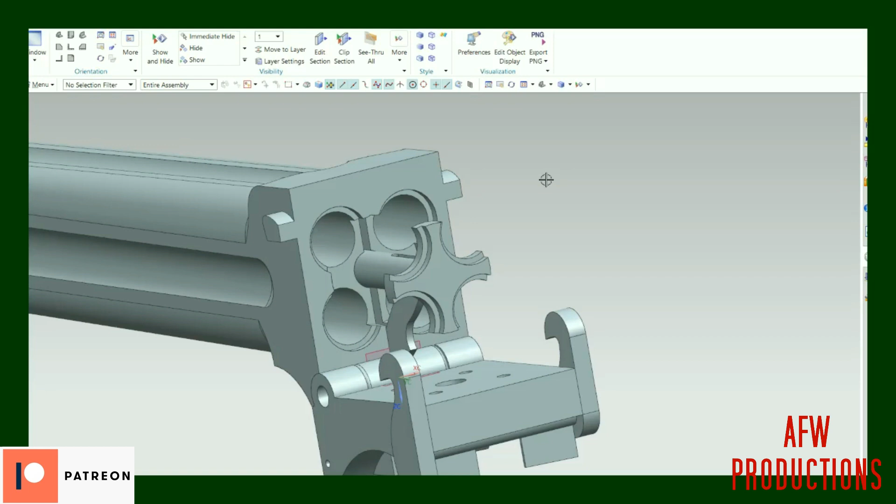Sounds cool. So we were talking about 410 shotgun shells too. Could those be fired through the 45 Colt barrels? I believe so. I think you just have to be wary of the length of them. I like that too. It's a cool feature.

And to keep this more true to it, if you go back and look at any of the advertisements for the Lancaster pistols, which I talked about in that history video along with all the stuff they offered for it, shot shell was a big thing for these pistols. You could either have your lead bullets or your shot shell, and those were your 2 primary choices of ammo at the time. So I do want to make this more indicative of what you were getting back in the day.

Ideally I would make this as true as possible, with oval bore rifling, but with laws and regulations now, it makes it a little more complicated. Not to say that it can't be done, but take the Governor or the Judge. Taurus makes one, and I forget who makes the other one, but they're 45/410 revolvers designed to take 410 shotgun shells, but the barrels themselves are rifled, so it doesn't really help the spread.

If anything, the shot shell is probably going to be damaging the rifling, but there are options available for that, and it has proven to be something that people would be interested in having. So I don't want to take away one of the base features of the firearm itself and limit that. I want to make it almost as true as possible within reason, and there's going to be something more commercially available with regular conventional rifling.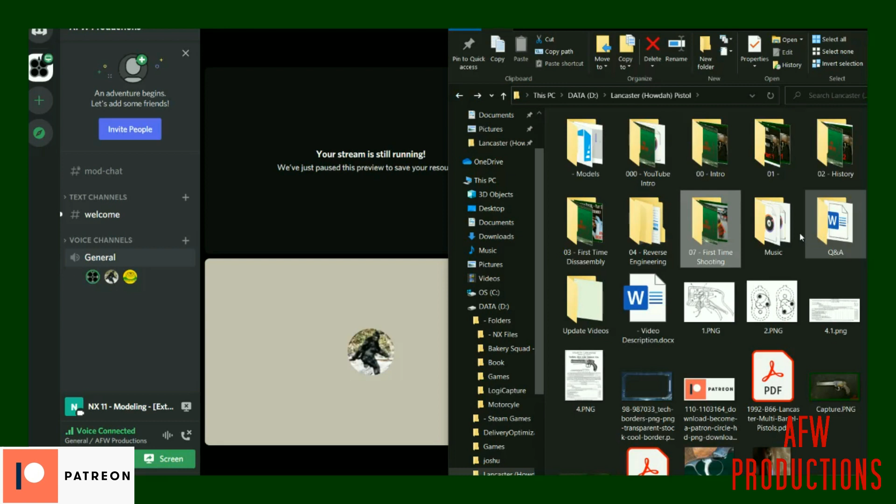And actually, what's really interesting is the way that you actually hold the Lancaster pistol compared to other pistols, say like your 1911s or your Beretta M9s. You hold it in a very unique way that actually helps reduce the recoil of it significantly compared to more modern firearms. And that's actually something that I'm working on. I guess consider this a sneak peek. Let me see here.

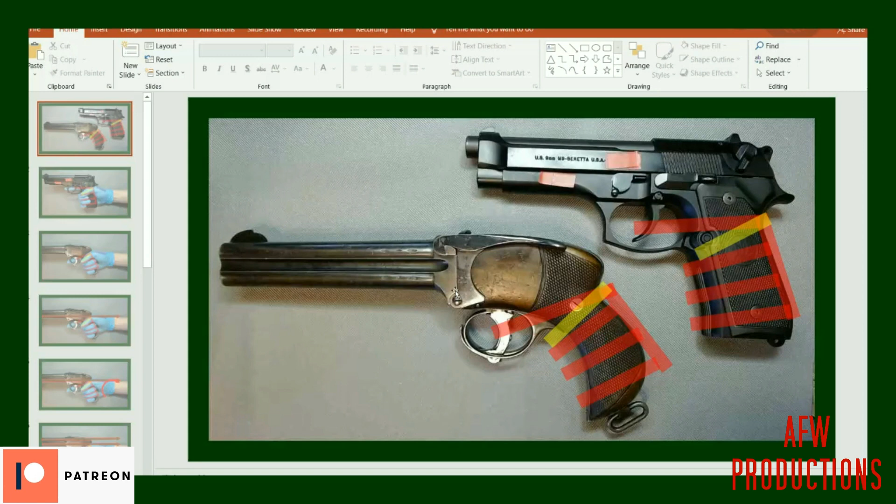So this was something I'm working on. So I did that little montage, right, about shooting the pistol. But what I'm showing is essentially how your hand is actually on the pistols themselves. And what's unique about the Lancaster pistols, if you look at the Beretta that I have here, you've got your center line for the barrel way above your hand.

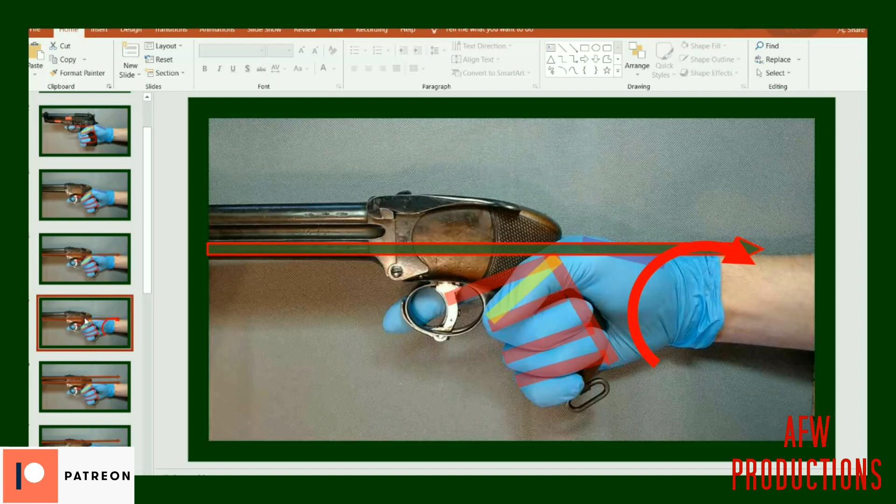Where with the Lancaster, you've got the barrels more in line with your hand. These are your lower barrels here, showing the moment about your wrist that's going to create the recoil versus your upper barrel. But if you look at something like a Beretta and how you hold it, it's got more of a straight grip to it, so it's going to create a much larger moment about your wrist to give it more recoil.

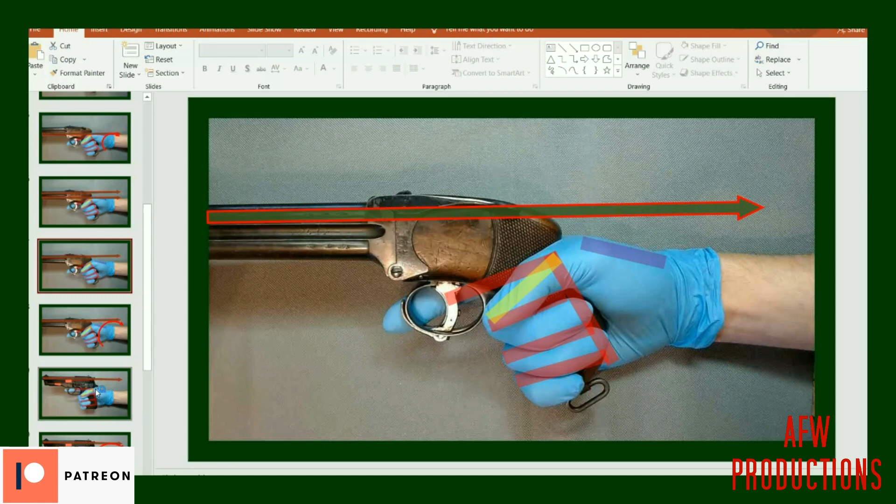So trying to keep the Lancaster pistols as true as possible, where the lower barrel is almost right in line with the top of your wrist and the top of your arm there. And the upper barrel is going to give you a little bit more recoil too, because it's up higher. But you shouldn't see anywhere near as much as, say, a 45 caliber semi-automatic pistol where the barrel is much higher, and it's going to create a much larger moment.

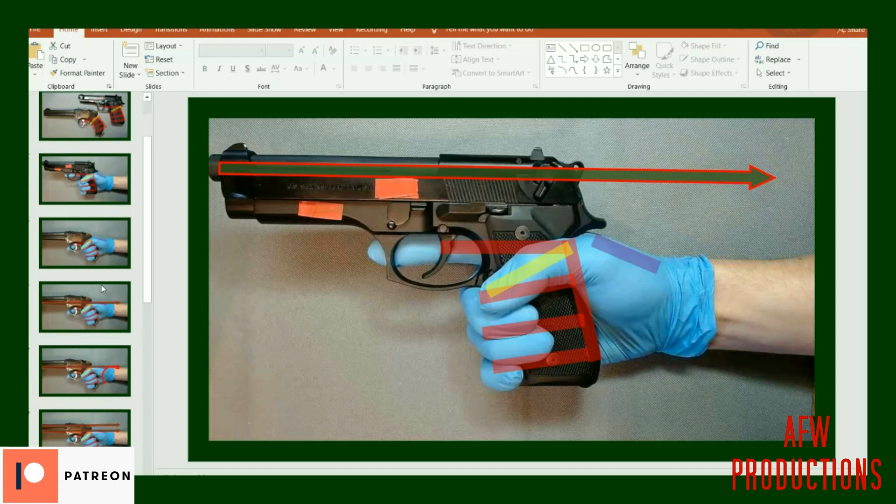So I do want to try to keep things as original, but I do think there are options to make it a little bit more ergonomic and to make it so it fits your hand a little bit better. So consider that a little bit of a sneak peek of an upcoming video.

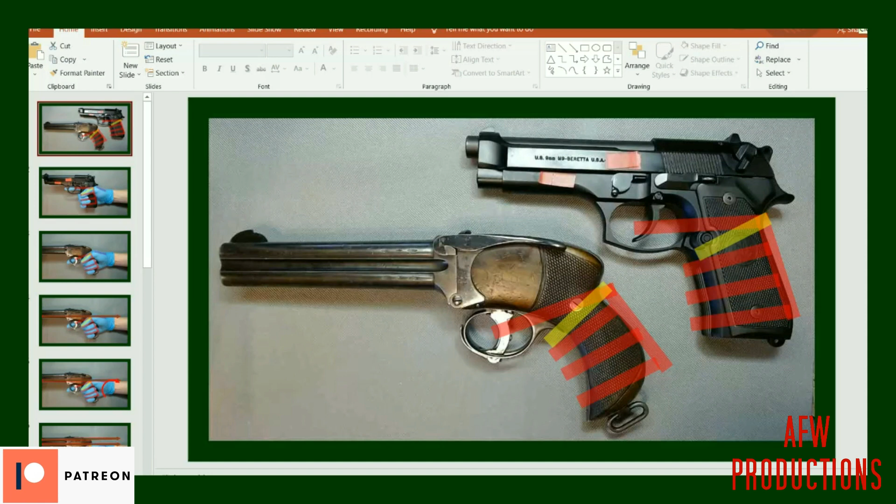Are you doing this whole project by yourself? Pretty much. I've got my moral support, my emotional support friends that kind of help out, and they'll give advice or have input, and some of my buddies review my videos. But for the most part, pretty much everything I'm doing is just a one-man team.

And I say that, but I do have a gunsmith that's been helping me out with a lot of stuff, such as reloading ammo, also giving me input: hey, I want to change the design. What do you think about how it was manufactured? What do you think would be a better option? So I do have resources to consult, but for the most part, the designing, the modeling, and all the research in the videos, that's pretty much all me. That's pretty cool that you do it all by yourself. Yeah, it was something that I thought would be interesting.

I think once I found the Lancaster pistol and I got myself one, and I'm looking into it more and more, I'm like, this is just a really cool piece, and I think it'd be really cool to bring some of these back, right? Because they were very popular, they were very influential around their time, but they were very short-lived and then got overshadowed by other stuff.

But I think just my interest in it, even though I'm a one-man team, it's something that I found myself diving into and becoming very fascinated with, to the point that I'm like, you know what, I kind of want one of my own. I kind of want to have one of these.

And to be honest, what I'm working on now with my gunsmith is we're trying to load 476 shot shell. He's got an old book that says how do you make 476 casings, and he's trying to see if he can get 44 Special and 45 shot shells and be able to reload them into our modified casings.

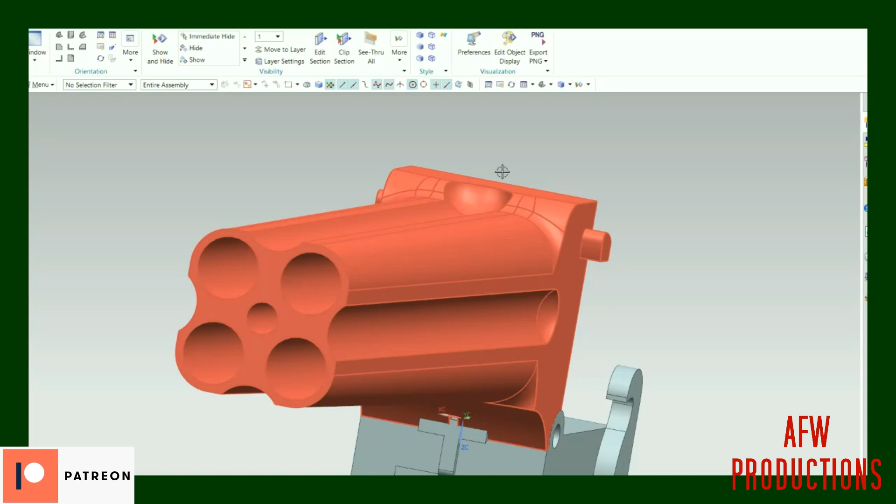And so if it's good for that, and I have an even thicker barrel liner, say I use my original design here, I keep the design the same and just don't take out as much material and make it for a smaller diameter. If it's already good for my 44 Magnum, then 357 would be no problem in there.

And using some of your more common Magnum rounds, stuff that usually has some sort of shot shell available, so you're not having to go out and try to get your own ammo. So trying to use stuff that's very similar caliber to the pistol that I have, and that's also more commercially available nowadays.

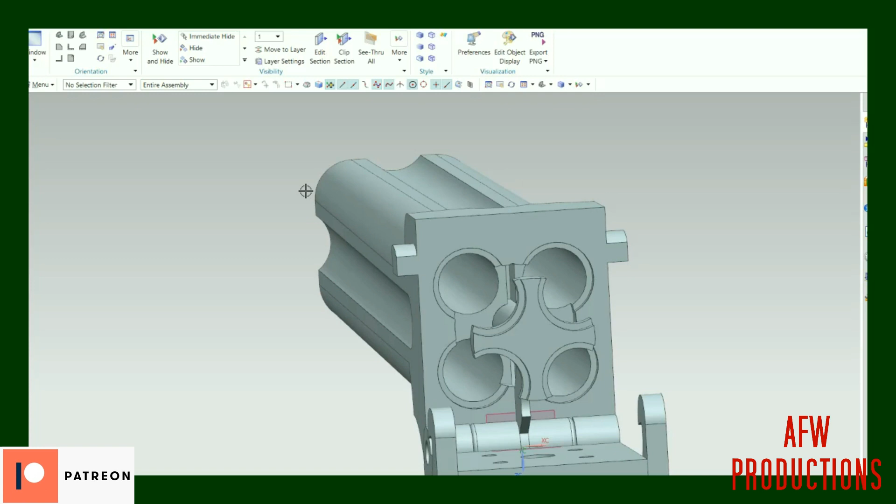I think you've answered all my questions, so thank you. Right on. Mike, do you have any other questions or anything else you think would be worth asking?

My last question is, when do you think you will have a working prototype? So part of this is, you know, while I'm trying to do the redesign, I'm also doing stuff with the pistol itself, such as getting ammo loaded for it, trying to get shot shell for it so I can take the original one out and go pheasant hunting with the original, right? I've got my girlfriend trying to make a holster for it so that way we can get a holster design and stuff made for it. So there's a lot of stuff that's kind of going on in parallel.

Once again, this is kind of a hobby. This isn't just something that I throw on the back burner in a couple of months and say, it's just kind of whatever. It is something that I am dedicated to, but it is a hobby nonetheless. By the end of next year, I definitely want to have a prototype made. You know, especially from somebody that's looking at this and supporting this, being like, man, this would be really cool if I had this in my hands next summer or something like that.

But in terms of what I'm capable of doing, what's the design, trying to find a manufacturer who can make stuff. I think that's going to be the biggest thing, is I could have this design done tomorrow, and unless I go and find a supplier and pay outrageous fees, it might still be 8 months to a year before they even get this on the machine. I definitely want to have the design done by early next year, and then hopefully try to get a prototype out by the end of next year.

Part of it also for being Patreon supporters. Some of the higher tiers will have an option to, once we proof the prototype, actually come out and try it and fire it more or less as a trial of the final product. The time frame isn't small, it's not condensed. I'm trying to be realistic about it, but I do definitely want to do stuff to keep people involved in it. Long story short, to answer your question, I'm hoping by the end of next year, depending on machine shops and how fast they could turn this around, if I were to have the design finished.

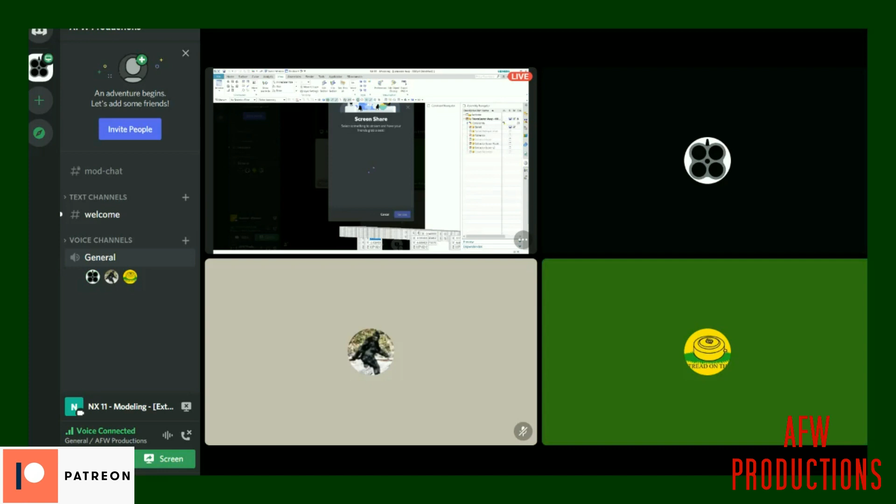Right on. Yeah, so I'm hoping to release some more content and more videos this month, how the pistol is actually held and how we're seeing the recoil patterns. And I've got other stuff about documents such as certificates of authenticity and other authentic advertisements from the 1870s and 1880s that I'm going to talk about too. So I'll have some more stuff coming out, but hopefully this was a good informational session and a little sneak peek on what's to come too.